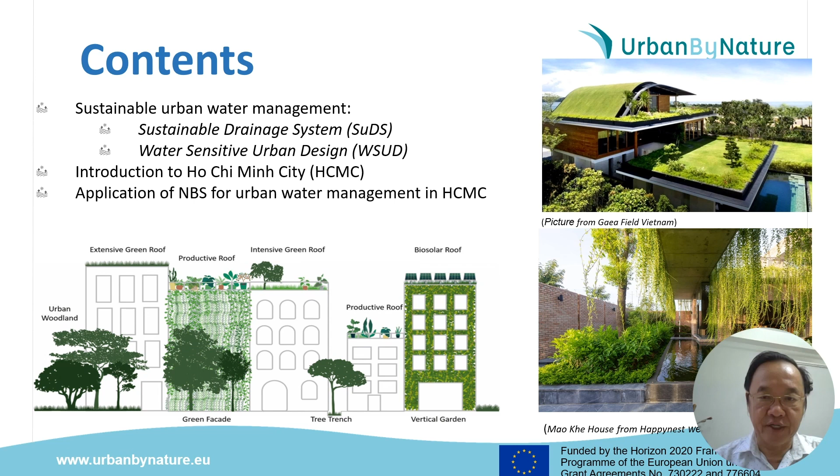My talk focuses on the application of nature-based solutions for sustainable urban water management in Ho Chi Minh City. I will briefly present the concept of sustainable urban water management, including sustainable drainage systems and water-sensitive urban design. I will introduce key issues related to urban water management in Ho Chi Minh City, and finally share two key projects on the application of nature-based solutions for urban planning in Ho Chi Minh City.

Urban water management involves the planning, development, and management of water infrastructure, including water supply, wastewater treatment, stormwater drainage, and water conservation, to ensure the provision of safe and sufficient clean water and sanitation services in urban areas. Nature-based solutions efficiently contribute to urban water pollution control.

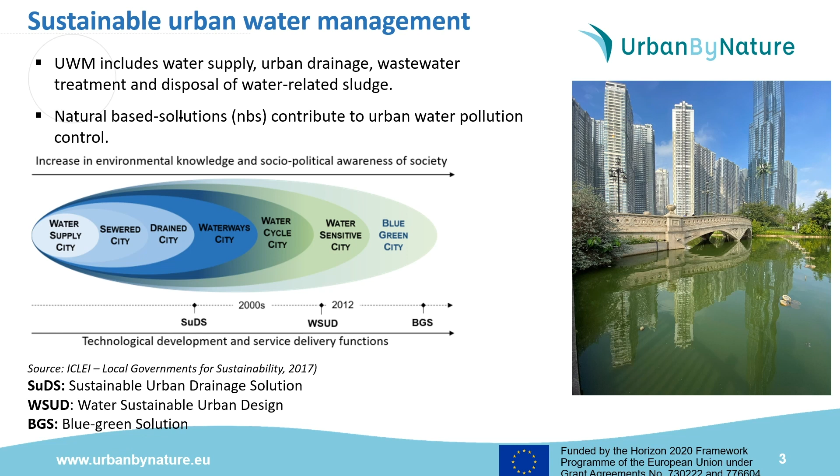The Blue-Green Solutions methodology enables developers and planners to incorporate nature-based solutions in a comprehensive strategy to address these issues. This includes integrating green spaces, natural drainage, and trees into the urban landscape. Urban planning can benefit from an ecosystem-based adaptable concept that mimics natural water balance and facilitates long-term sustainability. This approach has the potential to enhance livability values for city residents and improve urban biodiversity.

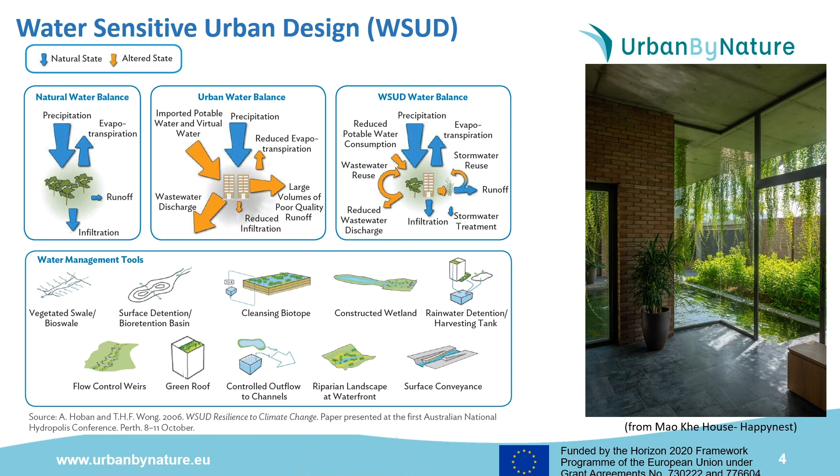The tools for water-sensitive urban design comprise various methods such as vegetative swales, wetlands, bioretention basins, artificial lakes, rain gardens, green roofs, permeable pavements, infiltration wells, and cleansing biotopes.

Now I would like to give a brief introduction to Ho Chi Minh City. Ho Chi Minh City serves as the economic hub of Vietnam, contributing significantly to the nation's economy. Despite occupying only 0.6% of the country's total land area, the city is home to 8% of the population and accounts for 20% of the country's GDP, and 28% of its industrial output in 2020.

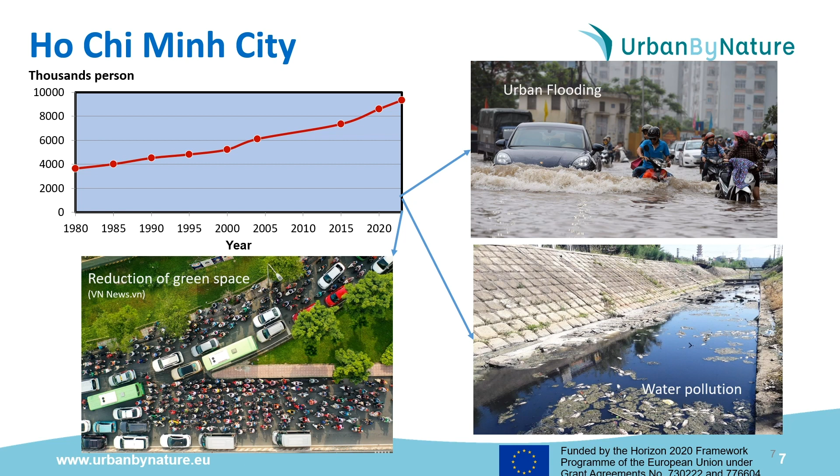The rapid rate of urbanization, which is expected to reach higher than 11 million by now, coupled with a population growth rate of 2.7%, presents significant challenges, including environmental pollution, flooding, and insufficient green spaces.

The land use pattern of Ho Chi Minh City is characterized by a dominance of agricultural land in the north, urban settlements in the central region, and the presence of the Can Gio mangrove forest in the southeast part.

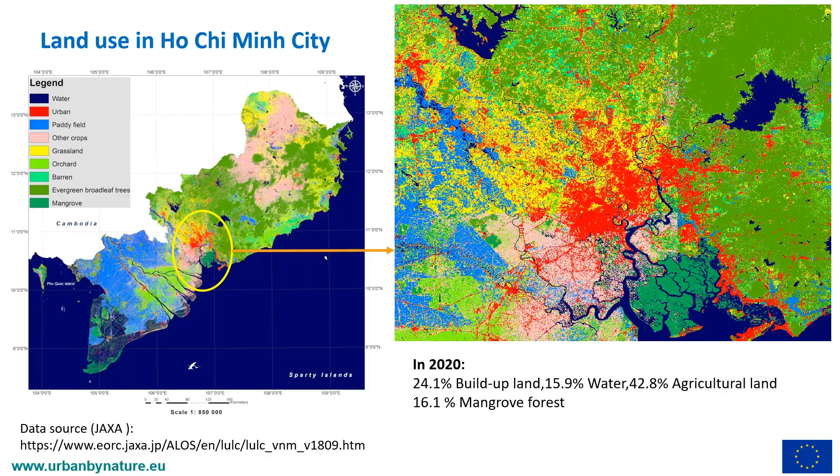Located downstream of the Dong Nai-Saigon River system, Ho Chi Minh City has a network of rivers and canal systems, with approximately 170 canals stretching nearly 700 kilometers. The southern metropolis budgets around $48 million annually to maintain its drainage system and approximately $120 million to collect waste.

To enhance the appearance of the urban zone and address the persistent problems of flooding and pollution, dredging and upgrading the canal infrastructure is a fundamental and sustainable solution.

Investing in new large-scale parks has proven to be a significant challenge for urban greening approaches in Ho Chi Minh City. Currently, the designated land area for parks exists at 11,400 hectares, which corresponds to the target of 7 square meters per person.

However, the existing park area is only around 500 hectares, which approximates about 0.55 square meters per person. This is significantly lower than the standard of green space for public usage, which is 12 to 15 square meters per person.

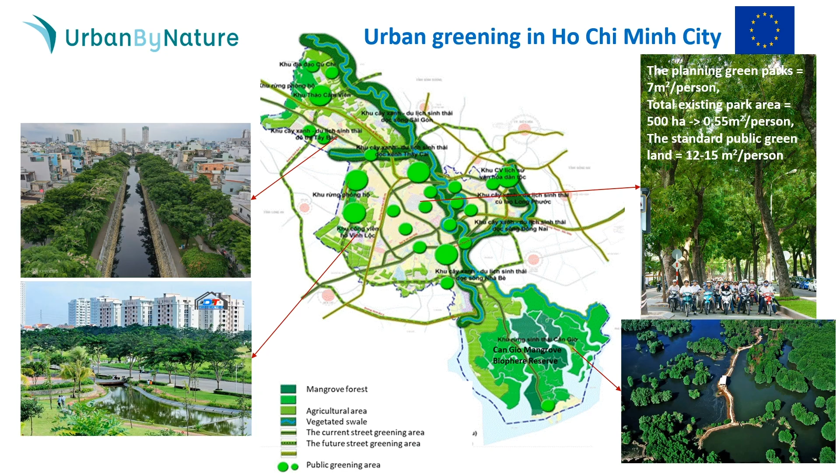Now I would like to present two typical projects related to the relevant research and process based on the application of nature-based solutions in Ho Chi Minh City.

The Asian Development Bank project aimed to mainstream water-sensitive urban design into urban development projects in Vietnam. Ho Chi Minh City is one of the target cities for this project.

According to ADB, the water-sensitive urban design tool can be easily incorporated into various urban development projects, with typical options including large open spaces with waterways, building units, civic plazas, and hardscapes such as car parks and roads.

In all cases, the presence of these spaces is crucial for efficient water storage, treatment, and conveyance for multiple purposes, including flood mitigation, runoff harvesting and reuse, heat reduction, and ecological value addition for recreational use.

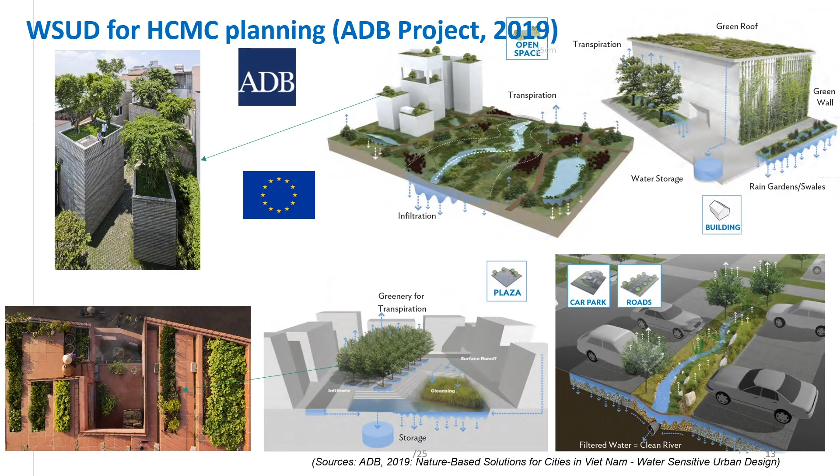One of the water-sensitive urban design methods suggested by ADB for cities with low-lying land and high-density waterway networks like Ho Chi Minh City is the implementation of multi-edge treatment. The term edge refers to the boundary between land and water, and it is essential to create a varied sectional profile along this boundary to enhance social and environmental values for both people and aquatic wildlife. These typologies provide schematic designs for creating a dynamic waterfront environment.

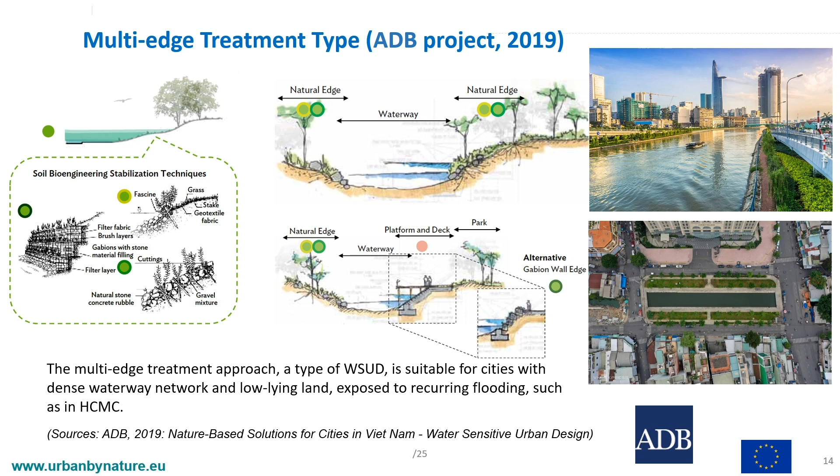The Go Vap district is situated in the northern region of Ho Chi Minh City Center, where certain canals are contaminated and there are several flood issues due to the tide and insufficient drainage. ADB has suggested employing soil bioengineering stabilization and designing floodable lands for the canal banks to construct a beautiful and river-interactive park for the Go Vap district community. This floodplain park could mitigate local flooding levels during storm events.

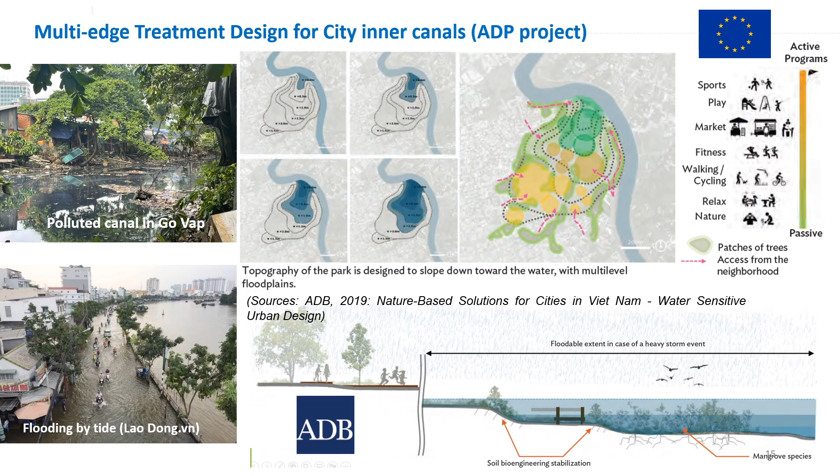Having been operational for over 20 years, the Tân Bình Industrial Zone now finds itself situated within a densely populated residential area, and there is a possibility it may transform into a residential zone soon. ADB has proposed converting the industrial land use into a high-quality residential neighborhood by adopting a multi-edge treatment design approach for waterways in the Tân Bình district. This plan would address issues such as flooding, pollution, and traffic jams.

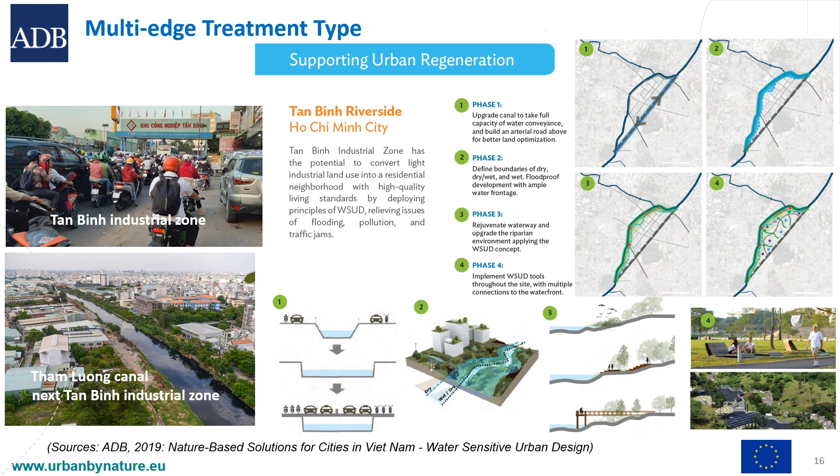The picture shows the site of Ban Nguyệt Lake, situated in the residential area of Phú Mỹ Hưng, located in the south of Ho Chi Minh City. The conceptual approach used for this new residential development shares a similarity with the case study sites suggested by ADB for Sen Pond in Hue City. The incorporation of steps, platforms, and walkways along the lake edge creates an array of experiences. Moreover, together with uptake of aquatic plants, low-cost water circulation systems hold potential in enhancing water quality.

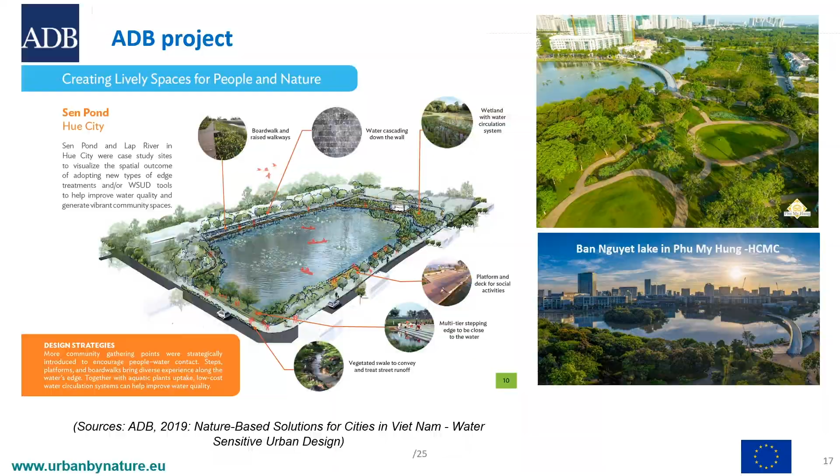Now I would like to present the IRD project which focuses on bamboo crops as NBS for urban water management. Bamboo crops can be considered a multi-purpose NBS for water pollution control in urban water management, coupled with urban greening. Bamboo can significantly contribute to urban greening due to its ecological benefits like carbon sequestration, absorption of particulate matter and nutrients, and water and soil conservation.

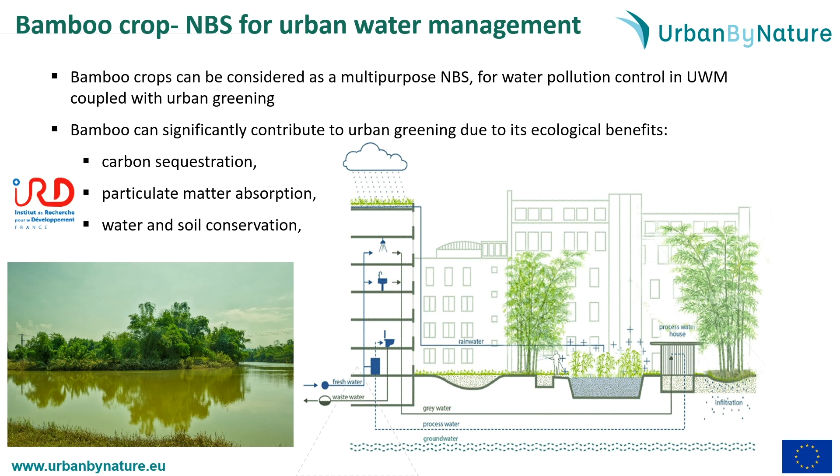The bamboo application can be a promising approach for water-sensitive urban design. Bamboo can be selected as a potential macrophyte for multi-edge treatment, such as natural edge, vegetative swales, rain garden, and riparian landscapes at the waterfront. Bamboo can also be used for resilient erosion control and slope stabilization in urban infrastructures.

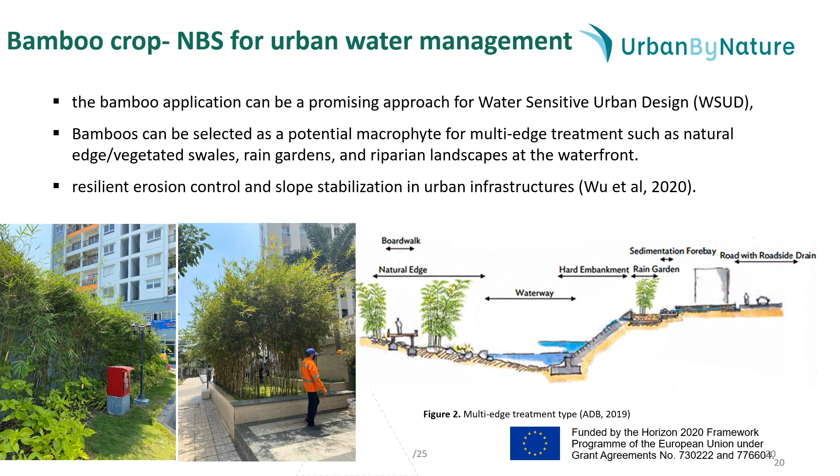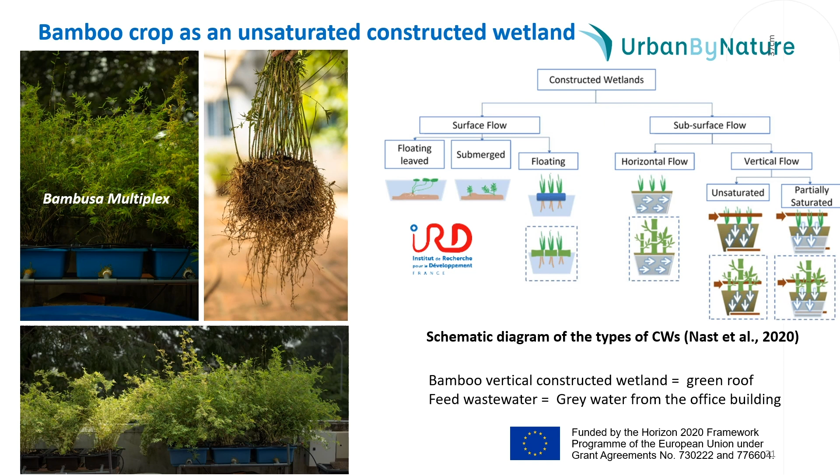In our current project funded by the French Institute for Research and Development, a thicker, smaller-leaved bamboo species called Bambusa multiplex, with a fast growth rate, was used for the unsaturated vertical constructed wetland at a semi-intensive green roof to treat grey water from the office building. After 3 months of running, high performance of COD, nitrogen, and phosphorus removal was observed at a loading rate of 300 kg COD per hectare per day, in comparison with the control unit without bamboo.

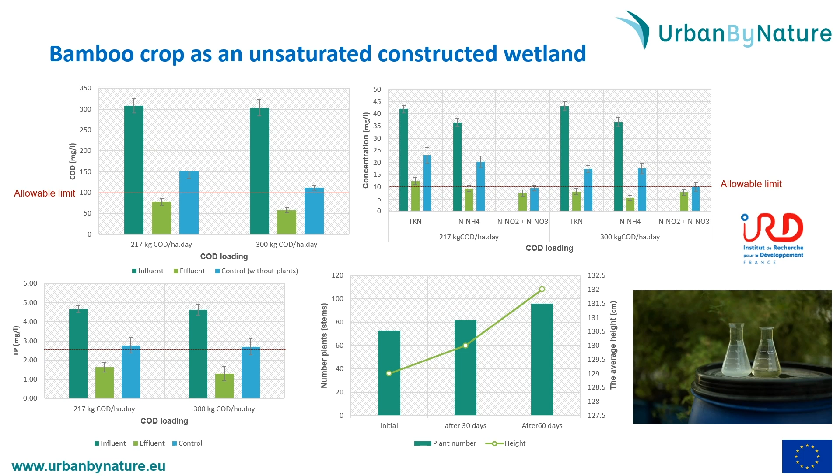There are two conclusions that can be drawn from my presentation. NBS is a potentially effective solution for wastewater treatment, reuse, and urban green space expansion, meeting sustainable urban management criteria. Local plants such as bamboo can be selected as potential modifiers for NBS design in sustainable urban water management. Thank you so much for your listening.